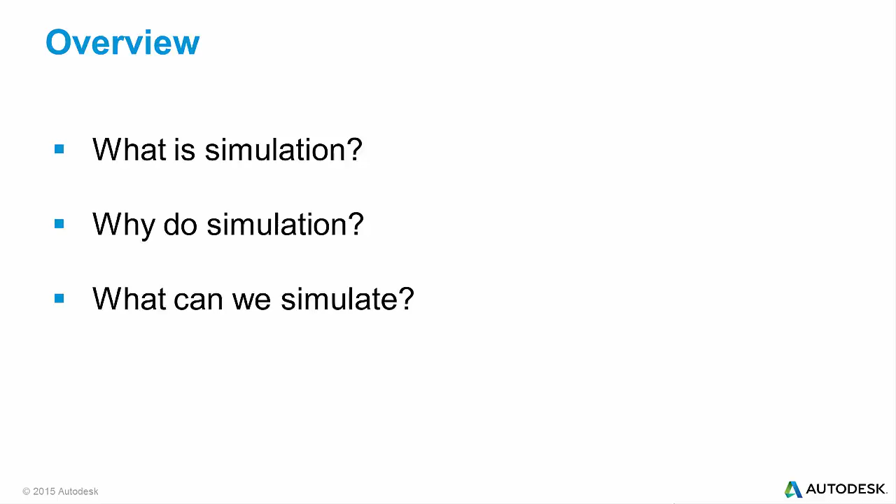It's good to begin our discussion with a proper definition of simulation. Here you can see the Britannica version, which defines simulation as a research or teaching technique that reproduces actual events and processes under test conditions. They further state that developing a simulation is often a highly complex mathematical process. Well, let's apply this definition to product design and view it from a timing perspective.

When the FEA method was first introduced as a means of performing mechanical simulation, the technique was applied to reproduce results from an event that had already taken place. That is, something that already happened in the past. This certainly proved to be a valuable tool for determining what went wrong following a design failure, but in a sense, it was originally used as a study that was forensic in nature.

As computing power grew exponentially and software technology evolved, engineers adopted a more proactive approach to applying simulation. This comes from the realization that it's far more cost-effective to use simulation as a prediction of how a design may perform in the future, rather than as a means to reconstruct why it failed. This upfront approach provides the greatest return on investment and also leads to dramatic design innovation.

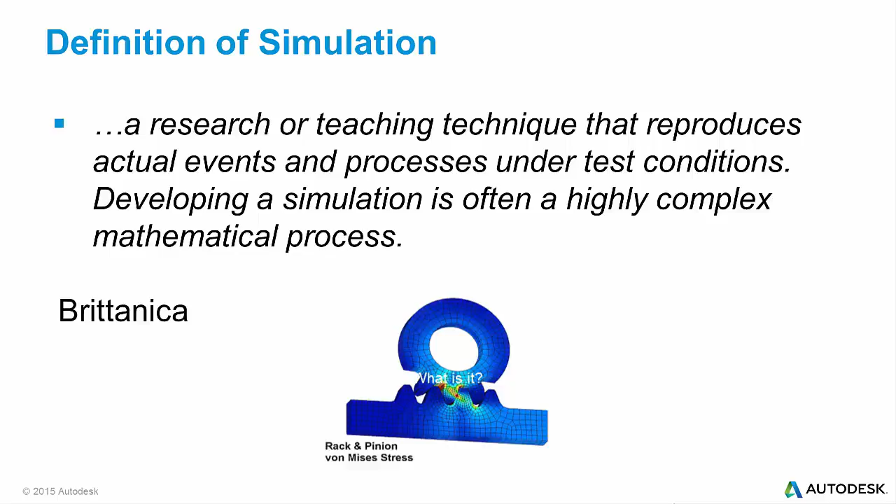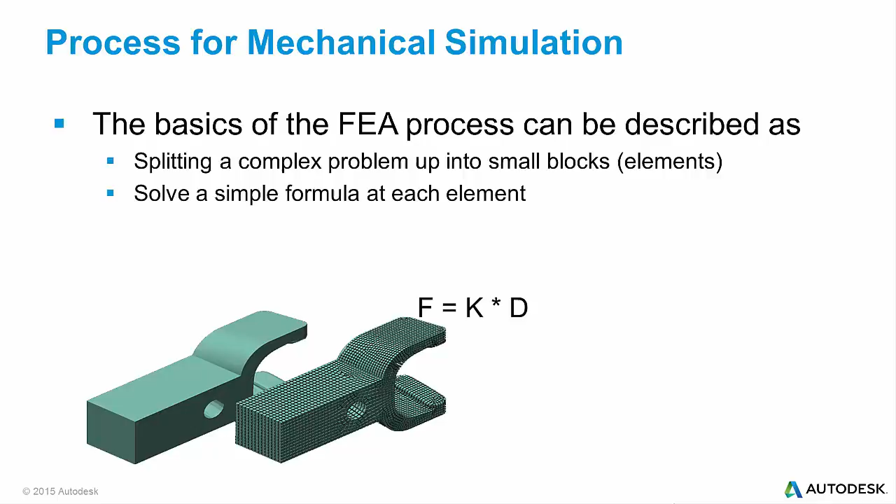When we apply the concept of simulation to engineering design, the most common methodology in use today is called the finite element method. This is a mathematical technique that is used in Autodesk software. It takes a complex shape and divides it into smaller, simpler blocks called elements. The method then solves a simple formula at each element, combines the answers together to yield a result for the entire object.

The results can be viewed numerically or better yet displayed as a color contour plot, shown here at the bottom right. The goal of mechanical simulation is to predict things like stress, deflections, thermal loads in a structure or component. We want to do this because too much stress or deflection can cause the structure to fail.

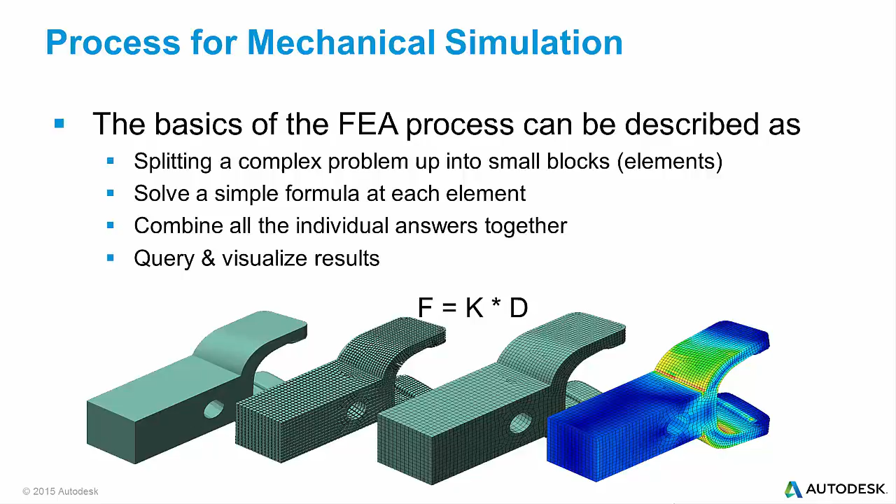There are three key user inputs required when solving mechanical simulation problems. They're shown here as the blue boxes we'll be building on the left side of this workflow diagram. First, a geometry representation of the design is needed. This is usually developed using a 3D CAD system, such as Inventor or SolidWorks. Most of you are quite familiar with this type of computer-aided design and have seen impressive models developed using Inventor.

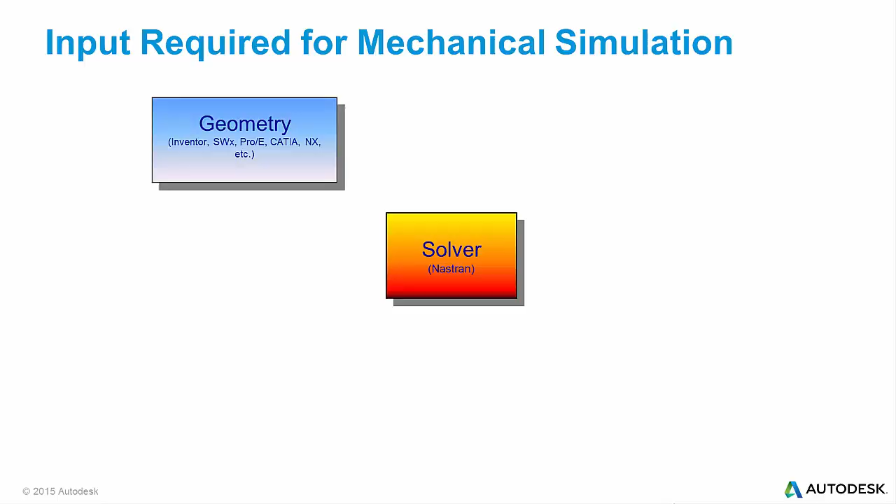Once the geometry is completed, the user must define what type of materials are being used in the design. For example, is this object made of steel, aluminum, or a specialty composite? Each of these materials have different properties that define how much they will resist or bend when forces are applied, so it's important that accurate material data is used.

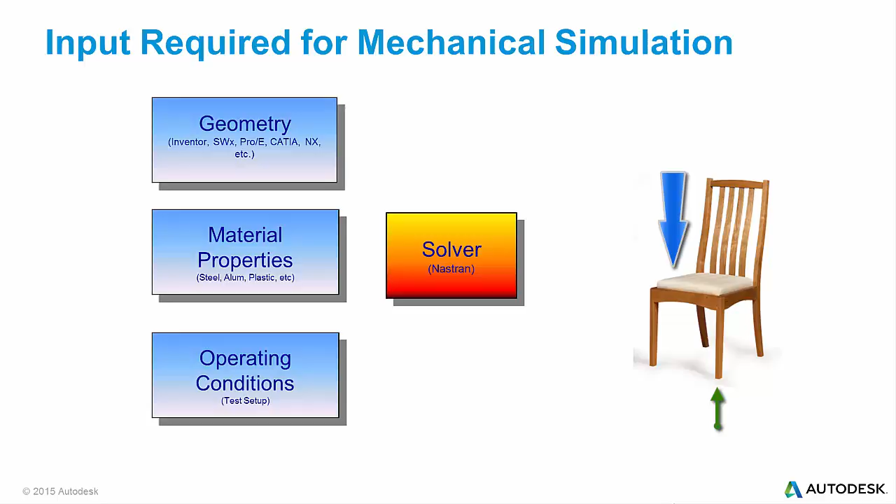Finally, the third input required is the operating loads or boundary conditions. In this step, the user can place different forces and loads on locations in the design and also indicate what regions of the geometry are constrained or restricted from movement. Think of the simple example of a chair. The load may be 500 pounds of force applied in a downward direction to the seat, while the constraint tells the program that the bottom of the chair legs are sitting on a solid floor and therefore can't move downward and they will resist the force.

Once the geometry, material properties, and operating conditions are set, the problem is submitted to the In-CAD solver, which in our case is Nastran. The solver then calculates the stresses and the deflections for each element, reassembles them, and provides predicted values for any part of the geometry. Using these answers, the designer can then check his results against desired performance.

The beauty of doing simulation on a computer is that it's a very repeatable process, and the user can change input variables to see how they affect the result. This means you can play many what-if games and try different geometries, different materials, or even different load cases, all without building a physical prototype. This significantly narrows the scope of testing and also allows for much greater innovation.

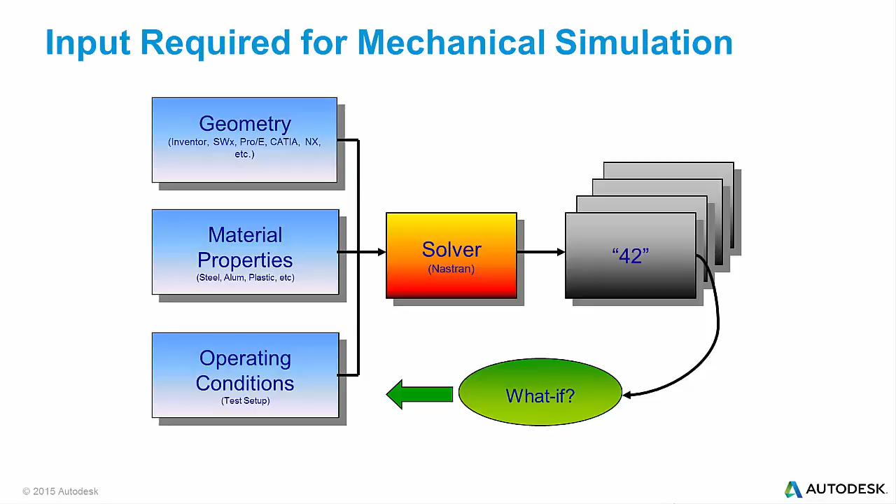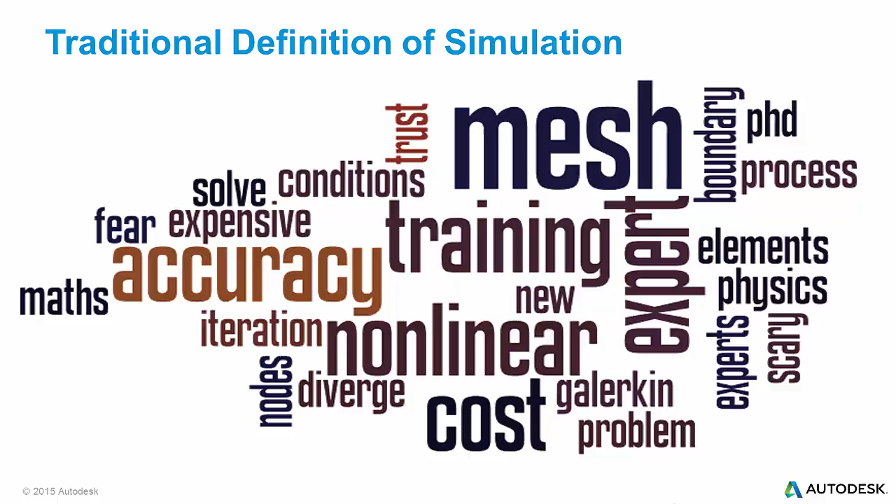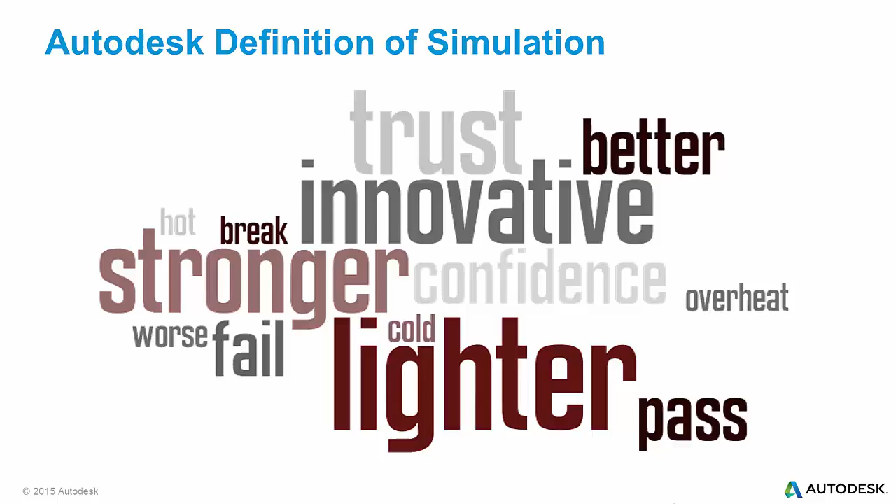When we discuss simulation at Autodesk, our focus is on the benefits rather than the technical features. Simulation is all about creating better designs so that your customers get products to market faster, which are lighter, stronger, higher quality, more reliable, and more innovative. Let's look at how simulation fits into the traditional design process and explore further why your customers should be using it.

Well, why do simulation? It's important that you can answer this question for your customers, especially those who are not using simulation today. Traditionally, design engineers have made physical prototypes and destructively tested them to see how they perform. This is generally expensive and time-consuming. Let's take a closer look at the issue.

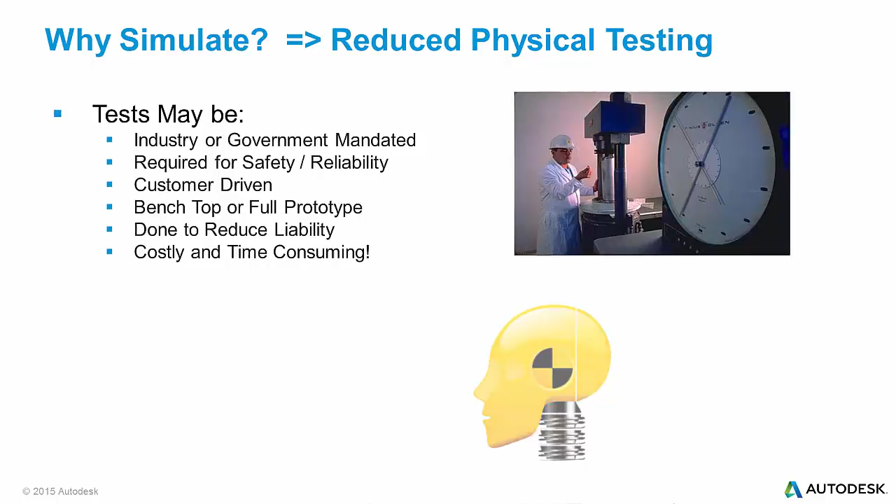In most cases, your customers' products are required to pass industry-defined tests in order to be accepted for commercial release. Testing requirements may be driven by government or industry regulations and often focus on improving product safety and reducing liability. Some common test types include strength, thermal, vibration, fatigue, and crash or drop shock testing. In all cases, these tests require complex equipment, monitoring, and setup, which takes a lot of time and is expensive. If a product fails, it may be many months before a new design can be developed, prototyped, and retested.

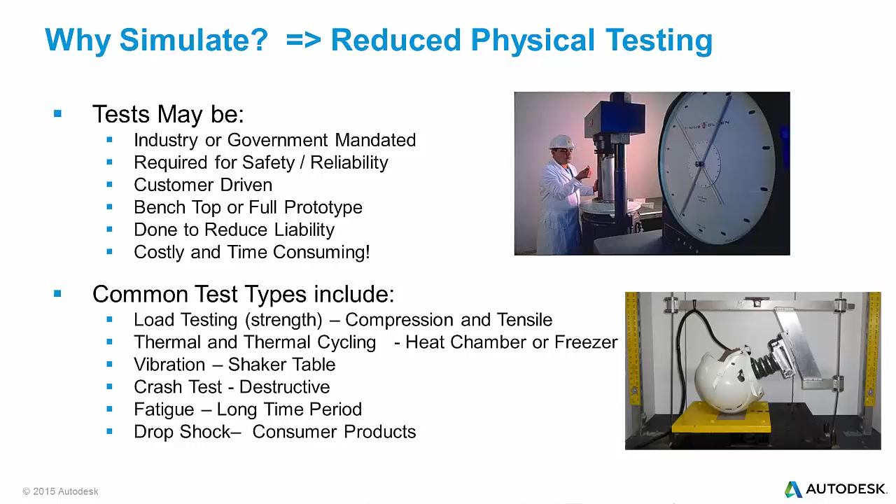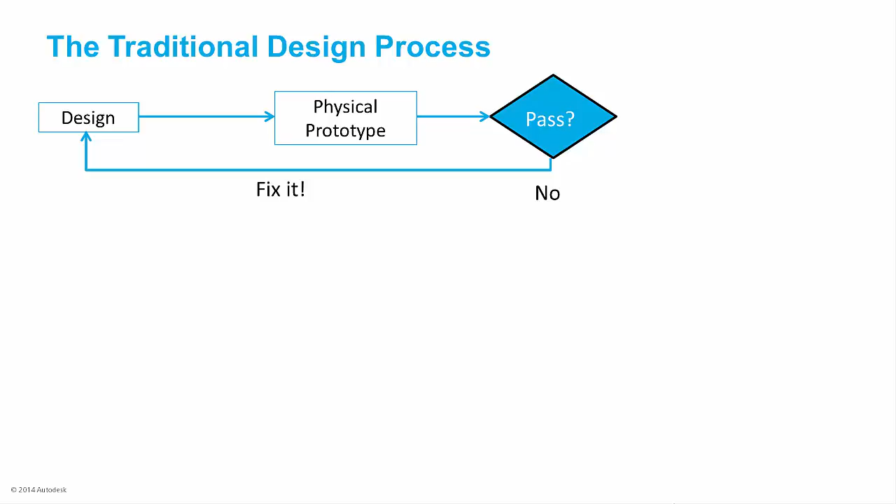The traditional design process relies on creating a design, building a physical prototype, testing the prototype, and then fixing whatever problems arise. The expression "back to the drawing board" was commonly used to describe the frustration of prototype failures. Design engineers have built up tremendous experience over the years and may rely solely on this test and break method to create a good design, but it's very unusual that only one physical prototype is made, and it often requires several loops of this design, test, and fix process. It's not only costly, but also increases the amount of time it takes to get a product to market.

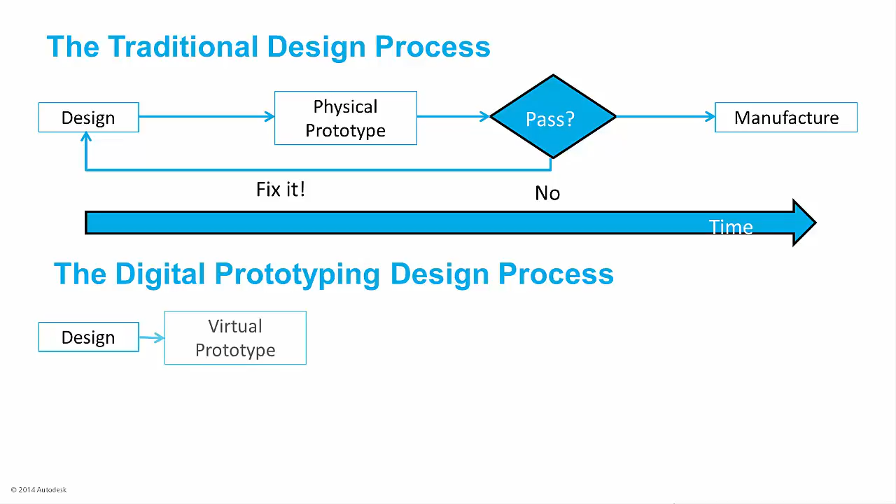Contrast that with a digital prototyping process. It uses the same engineer's experience together with computer simulation methods to create virtual prototypes. This leads to much smarter physical testing and greatly reduces the scope of testing that's required. It increases the likelihood of getting to market faster. Rather than the loop being made of fix-it guesses, it comprises what-if scenarios, which lead to increased innovation.

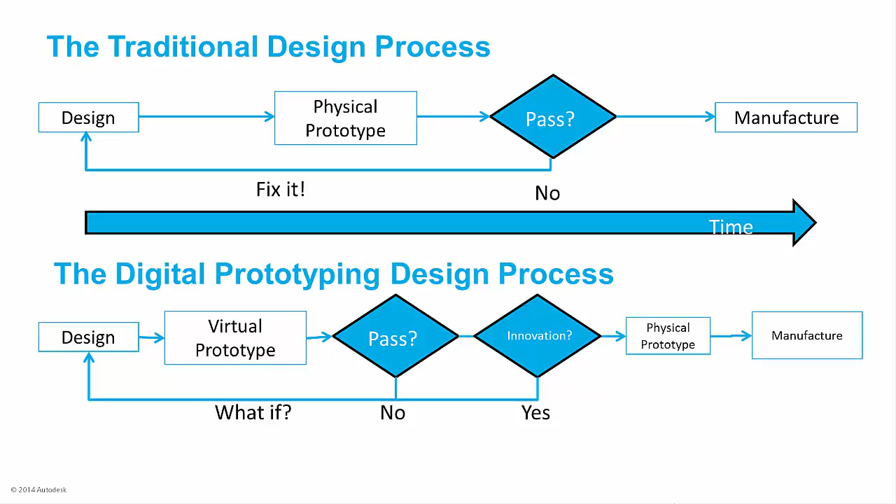The best news is that a very large percentage of manufacturing companies today, especially the small and medium businesses, have not yet implemented simulation into their design process. This untapped potential represents a very large opportunity for you.

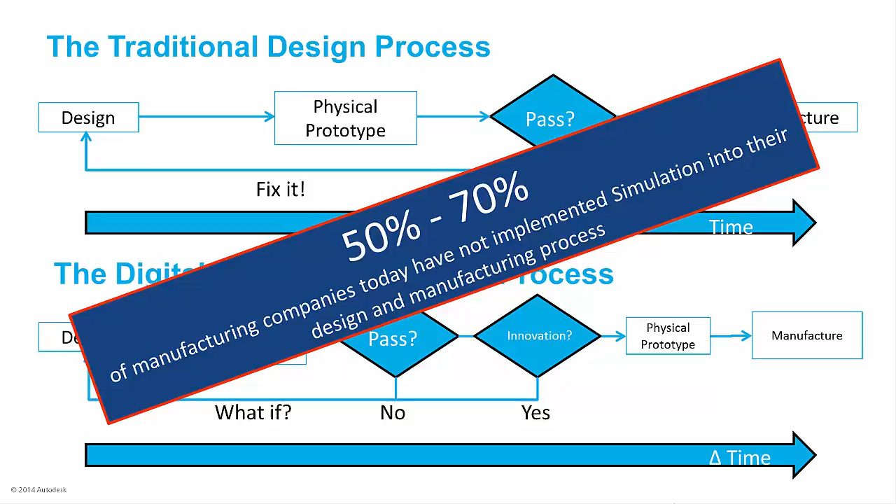In summary, the answer to the question why simulate comes from the tangible benefits that are derived. These include eliminating unnecessary cost, which is driving excess out of every aspect of your design. Remove uncertainty from your timelines. Ensure that your product development process is efficient and get products to market faster. Improve quality and customer satisfaction.

This tool helps you have a better understanding of how your product functions and helps you reduce defects and deliver higher quality. Reduce unknown risks. Simulation limits your exposure to failure and liability issues. And finally, secure competitive differentiation. Ensure that your employees have the tools to develop innovative products that keep you ahead of your competition.

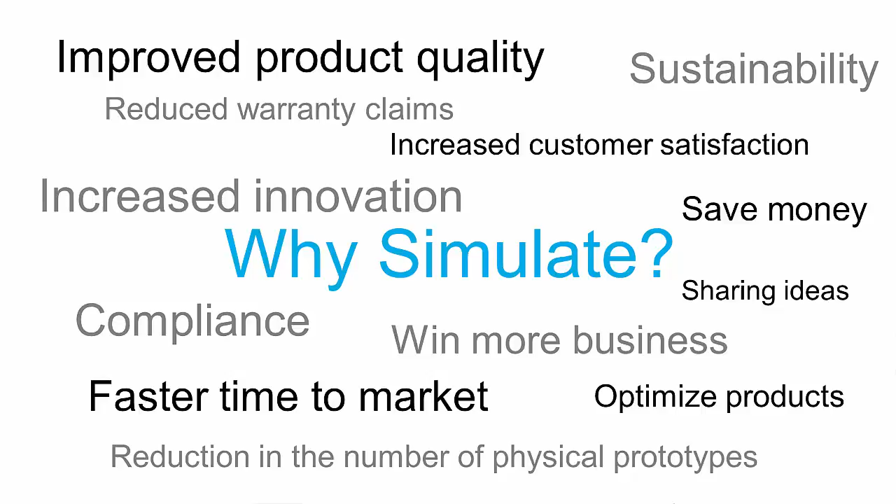Now that you understand what simulation is and why companies are using it, let's look at the types of problems that can be solved with Autodesk simulation, again with a specific attention on the Nastran In-CAD solution. Autodesk offers a wide range of products that cover 5 distinct engineering simulation disciplines: mechanical, CFD, plastic injection molding, composites, and building structures. While CFD, or computational fluids, plastics, composites, and building structures are important, they won't be our focus today.

For the purpose of this session, we will concentrate on mechanical simulation as a discipline, not to be confused with the Autodesk Simulation Mechanical product. And specifically, we will look at how mechanical simulation can be handled via the Nastran In-CAD solution. This discipline represents by far the largest opportunity for you, our manufacturing partners, and it's an excellent fit for your Inventor customer base, and also competing CAD products such as SolidWorks.

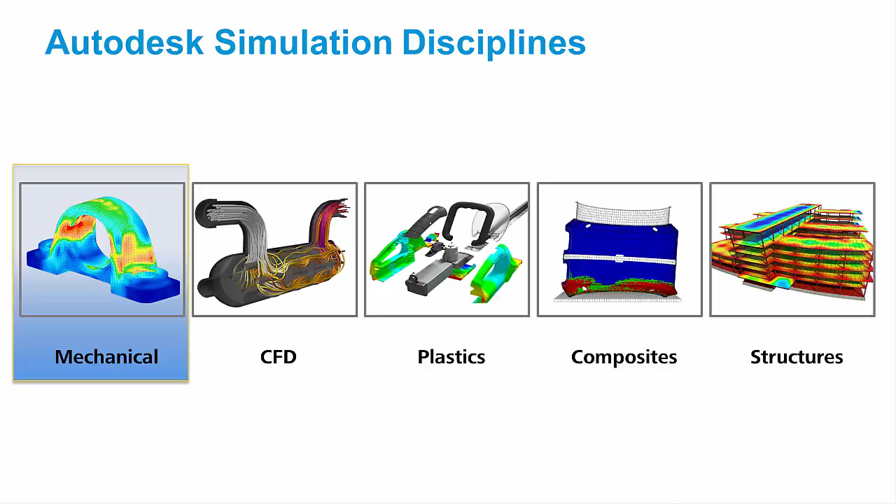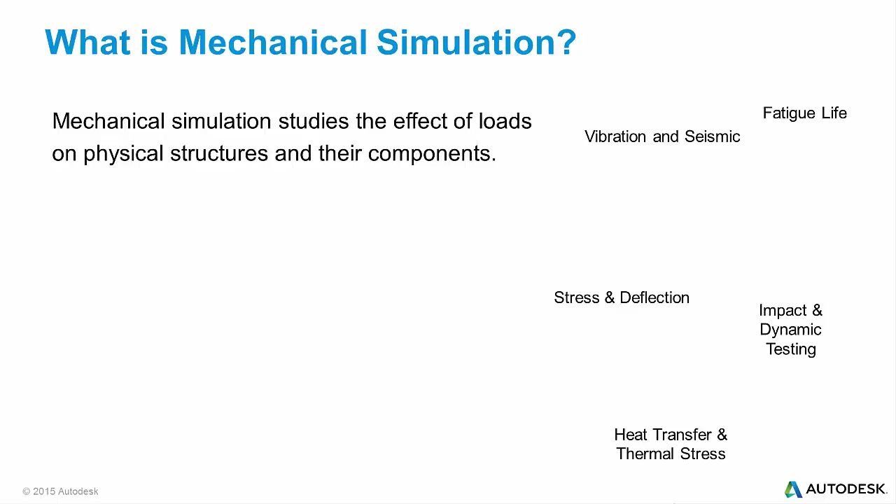The discipline of mechanical simulation is a rather self-explanatory term. Engineers use this type of analysis to examine the physical performance of their mechanical designs and see how much stress is created by forces and deflections. Included with mechanical discipline are dynamic and transient loads, which just mean that they can vary position, direction, or magnitude over time. Most products are subjected to this type of condition during normal use. It's also important to understand, for example, how much a design will vibrate and deflect, or its reaction to seismic loading.

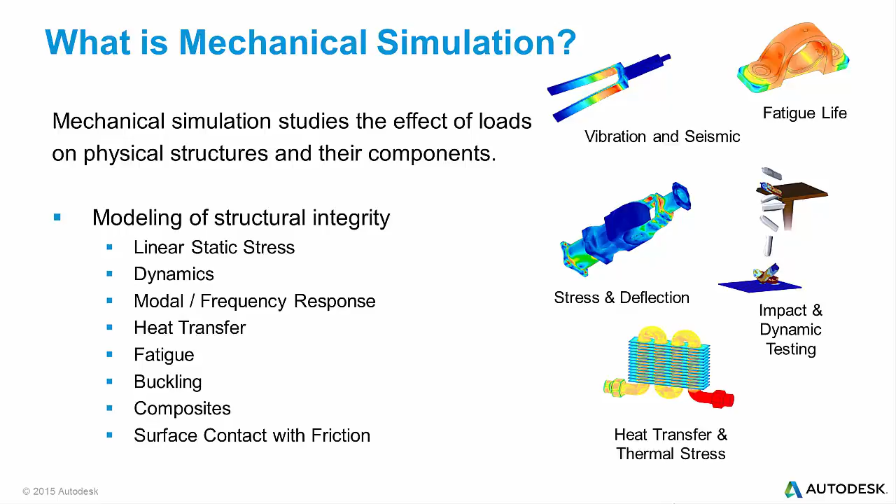Engineers also need to determine how long a product will last when subjected to repeated loading. This is known as fatigue life. Another concern of mechanical designers are problems that arise due to heat. Most materials will expand when heated, however, they do not all expand at the same rate. This difference can cause very high stresses and lead to failure, especially when two different materials are fastened together. This phenomenon is called thermal stress, which is also part of mechanical simulation. All of the capabilities which I've just discussed are included with Nastran In-CAD.

Users of Nastran In-CAD can answer critical questions about the performance of their design. For example, will my part bend? If so, how much? Will it break? When will it wear out? Does it vibrate too much? How hot will it get? Can I use a different material? Every product is subjected to some type of mechanical loading, so your potential customer base is very broad.